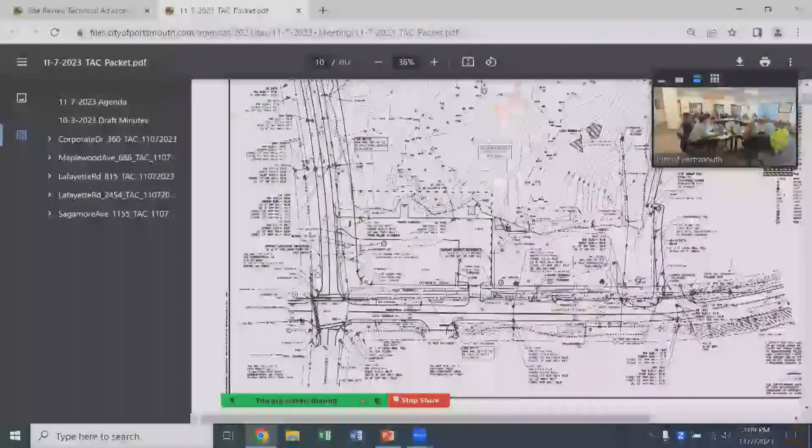To be honest, Eversource has done a site visit - their construction team has gone out and done a site visit, and we're waiting for feedback from them. But that is a placeholder from that standpoint, because that feed may not actually happen in that manner whatsoever. So I would finalize that before a planning board appearance, just so you have something from Eversource saying that we're good.

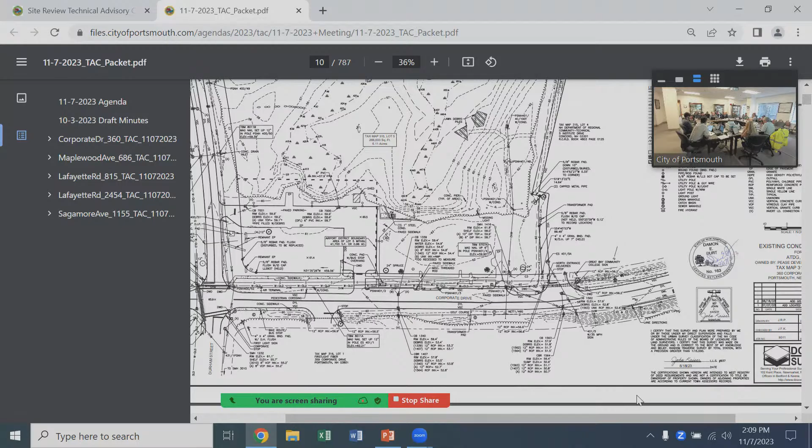That makes sense. And just to clarify, other than that, there are no more easements. And just to clarify, we do have an agreement with Eversource, similar to the one with the City of Portsmouth, where they also have the ability to go in on anyone's property and service their equipment. So I think part of this is a change in how we do things in the city versus PDA because of the agreements.

You own the fee on all of it. So it's leased property. But if you can at least clarify that for the planning board and be ready to address it.

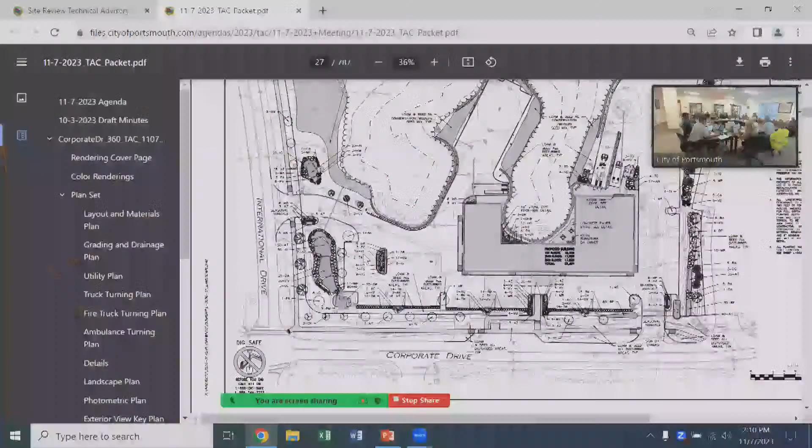I had a question about this plan - you show the wetland and your landscaping plan, let's see if I can find it here. The landscaping plan's pretty robust around the edges and different areas. The one area I don't see anything detailed, except for maybe this note over here, is - I think this wraps around to loam and seed this whole area. Is that the plan, you're just going to loam and seed the area adjacent to the wetland and that buffer?

That's correct. There's substantial topography differential, basically where the parking lot area is, so anything that fills in next to the parking lot area will have a specific seed blend. Some of those areas are called out not to be exactly loam and seed - there is a wildlife blend requested for those areas, conservation wildlife, that's in the shaded areas. I saw that, but in the grass between the buildings and the wetland, it's just lawn you're going to be putting in.

You're going to be mowing that? It doesn't say anything about maintenance or what's going to happen in that area. That's actually a functional buffer for that wetland. It'd be nice to see some plants, some shrubs, some other species. I don't know why the landscape plan doesn't address that at all.

Like Jeff was saying, there's quite a bit of grade here. We're picking our site up, and right along that buffer line is a retaining wall, so we're high and the wetland's low. There should only be 18 inches of disturbance between the wall and the buffer, so it's intended not to be maintained. It's not a mowed lawn, and it's not planted, it's just in its natural state.

So all I see here is a mowed lawn, because this note right here, the only note that addresses it is loam and seed, all disturbed areas, which to me means lawn. That's fair, but the disturbed area would only be, like I said, at the bottom of the retaining wall, very narrow, say 18 inches.

I'm not concerned about the disturbance during construction. I'm more looking for a functional buffer. And if you said in there no mowing, no maintenance at all, which probably isn't what you're going to want to do, you're probably going to want some maintenance. If you mowed it annually, maybe that would be better, but something that at least talks about how that area is going to be used and maintained as a functional buffer.

Which area specifically are we talking about? Here's the wetland, obviously you're not going to do anything in there. And then this area here is wooded, and it would remain wooded. Well, it doesn't say that anywhere, and it doesn't show it, and there's definitely disturbance to parts of it.

There's no disturbance to any of that wetland buffer there. The only reference to loam and seed that I'm looking at on the drawings is actually at the northwest corner of the parcel, which is in the right-of-way. If you look at the landscape plan, that's all white, so that's the only reference I see. But what I'd like to see, what I don't want to happen, is I don't say anything, and then in a year we go in there and you guys are mowing it right up to the edge of the wetland.

That's not what we want. To remain undisturbed in its natural vegetative state. If you're going to leave it and not do anything with it, then say that on the plan. We can add a couple notes, and then we can think about how PDA or the architect can enforce that.

The landscape architect tries to depict that with their scallop tree line. In her mind, that's wooded area to remain. Right here I see some scallop tree line, but if you zoom in a little closer, it's all the way around, continuous. So in her mind, that scallop, yes, that's all tree line, just wooded, to remain.

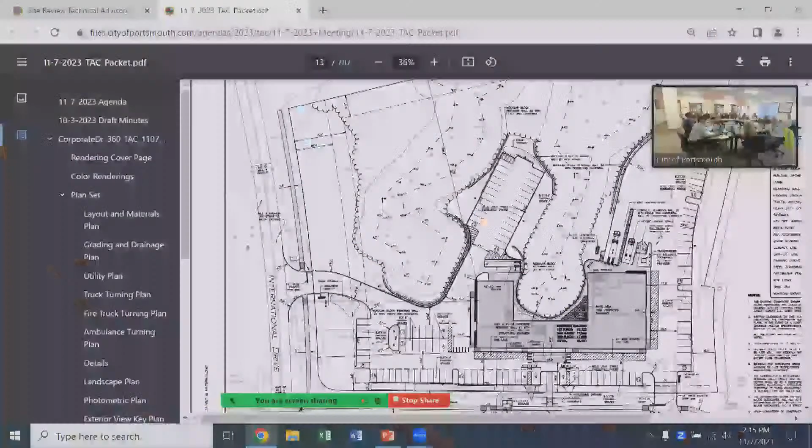You're talking at the northwest corner, correct? Yeah, right here. Rather than stopping it at the lot line, bring it up to the next driveway. Yeah, that could definitely be incorporated, without a doubt. Okay, then I'll make that a condition when the time comes.

I know tactile pads are now the PROWAG requirement, but it's not enforceable yet. Any commercial driveway with a stop sign is supposed to have them, but it's not yet required—just recommended best practice.

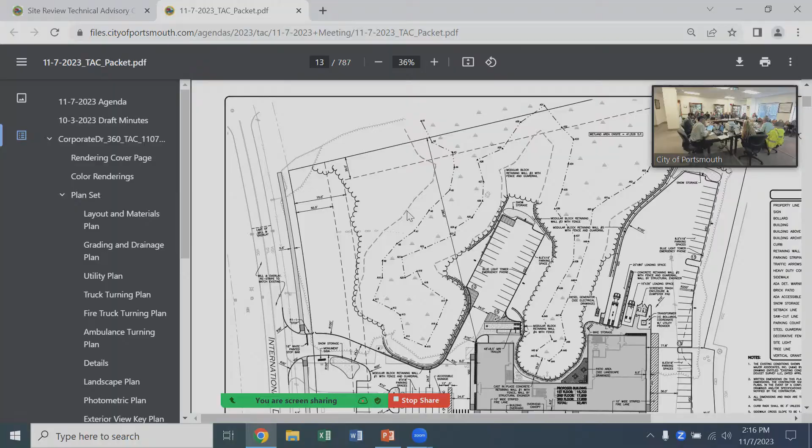I think we can definitely incorporate a tactile pad there. At each one it makes no sense not to have a tactile pad—so that would be the two on International Drive, the driveway on Corporate Drive, and where the sidewalk ends at the abutter's driveway.

So tactile pads at all driveway crossings, basically? Wherever there's a stop sign on the driveway, it's required—commercial driveways big enough to have a stop sign and stop bar, not residential driveways.

On this site plan at the driveways, this is an articulation for a fairly significant size building. To be clear, we have tactile pads located at each driveway. So it's already shown on the plan?

That would be your site plan—you'd have to find it on the details. It's pictorially shown, just very small. And if I recall correctly, there was some back and forth as to whether we want them or not, but we're happy to do it.

Okay, so we'll make it a stipulation since the rule changed—the feds changed the rules. You haven't been coming to meetings that long. It's no problem, probably happen again if you don't get an approval too.

Any other questions or comments? Anybody want to make a motion? Do we need to have a public—oh sorry. If there's no more questions or comments, I'll open it to the public. Anybody here speaking for or against this project? Seeing no public comments, we can move on to questions or take a motion.

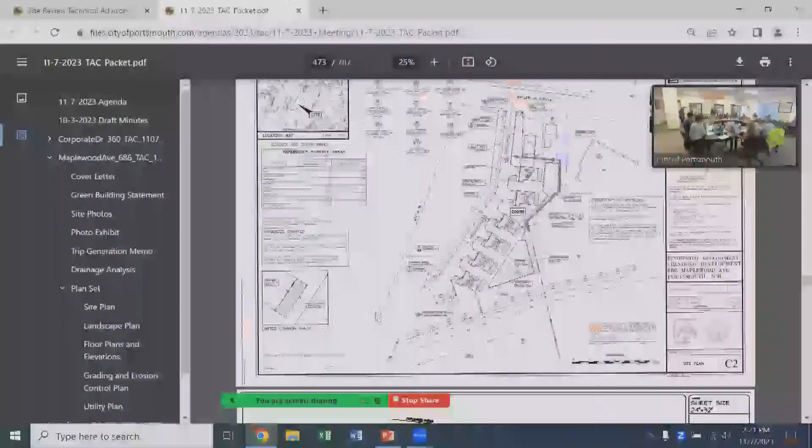The next plan is a landscape plan. There'll be some plantings along the edges, and at the entrance on Maplewood there'll be a well-landscaped entrance facility.

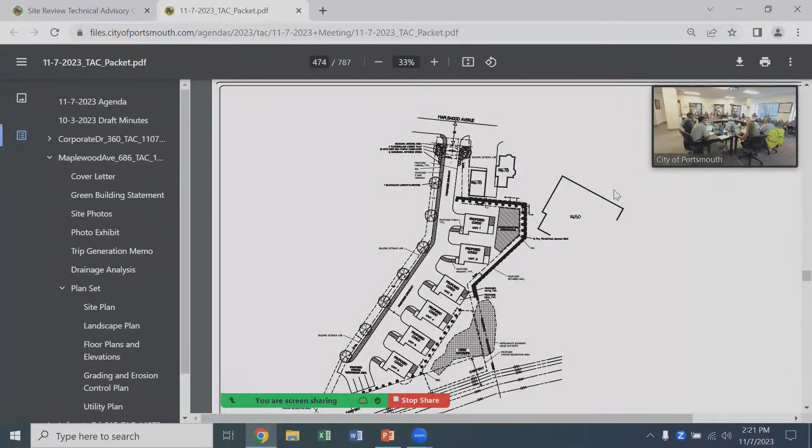The next plan is the renderings. Carla Goodknight did the architectural work, so you have floor plans in the bottom left, rendered views of the site on top, and elevation views of the units on the bottom right. They're drive-in slab on grade with two floors above, the second floor being dormered.

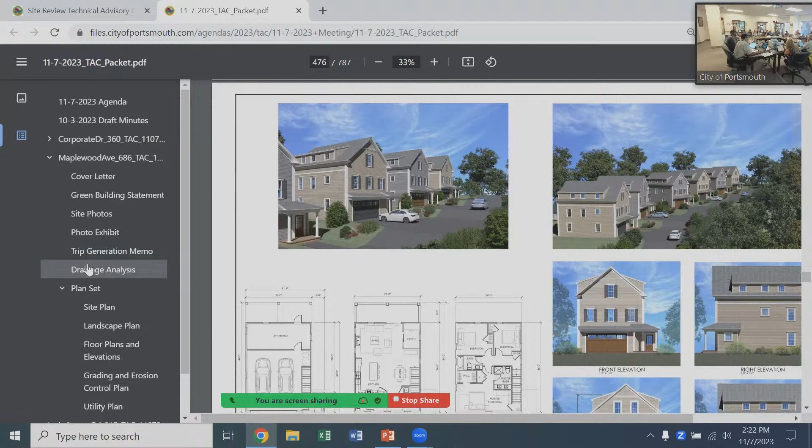Next sheet is grading and erosion control. The street will be sloping from the south side to Maplewood at a pretty consistent grade, with catch basins on the right side. Looking right of the driveway, it'll be sloped over, and that drainage will be collected and brought into an R-tank system to attenuate the peak flow. It'll come back out and connect to the drainage in Maplewood Avenue.

The next sheet is a utility plan. There's going to be a sewer line with manholes, sewer main, and services coming in. It's the same with the water, although we have some comments about that we'll address. Underground electric will come to a transformer in the middle and then be redistributed as secondary. We're looking into gas, but I think gas doesn't go that far up Maplewood.

And then we have the usual detail sheets. Included in the submission is a trip generation analysis. The site is not going to generate a lot of trips, just 4 in the morning peak and 5 in the evening peak, based on the ITE trip generation rates. We also have the green building statement from CJ Architects.

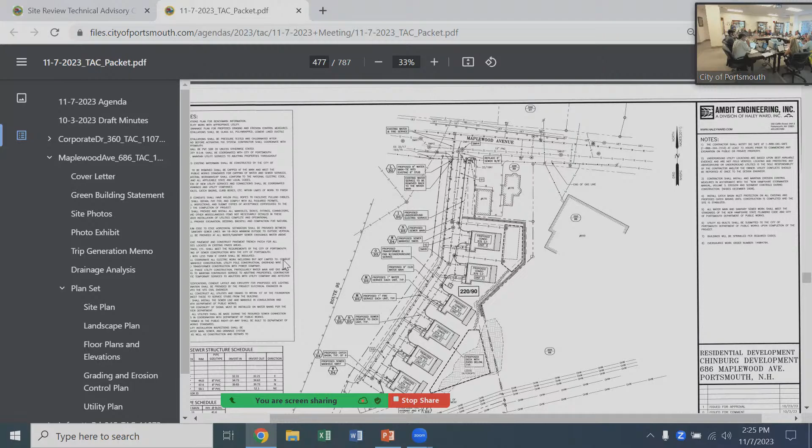The next comment is to extend the hydrant stub to around the first house and install the hydrant there, then proceed with a 4-inch main for the home connections. That's a good comment, as long as the fire department's okay with it. Did you understand the comment? I did - basically we want to limit the size of the big main for drinking water. We were thinking, without asking you guys, would it be better to have the hydrant before you get to the first house? So if you're going to use the hydrant, it's right there before you get to the fire. Well, we're going to lay in a reverse line instead of going all the way down in the back. Yes, that makes sense. To me, it makes sense.

Okay, these are all sprinklers as well, right. Which, because there's no cul-de-sac, no turnaround - the only question I had, David, is about the end of line. Do you want a flushing hydrant still at the end? I honestly don't think you need one, because it's such a short section of ductile iron, and you've got 6 houses drinking off it, so you should be okay. Okay.

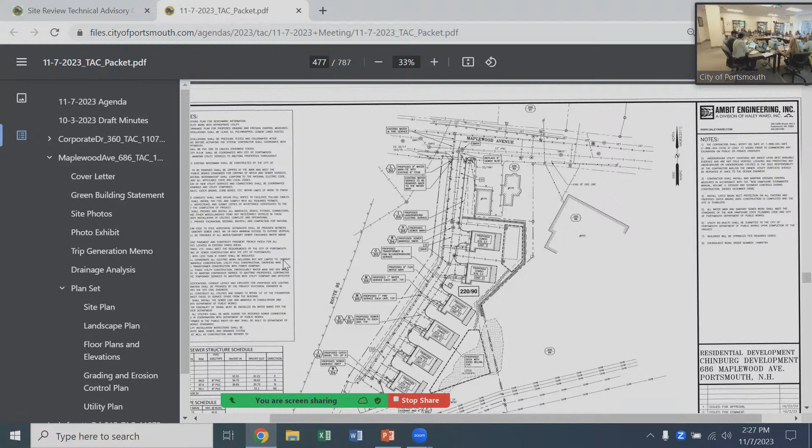Some other detail requests - the next one is to provide a more robust landscape plan that includes a planting schedule, and we will work with the landscape architect. Is there a specific comment or area that the committee sees needs more planting at this time?

That was my comment. I think we were just looking at, so there's a lot of the black pines along the back edge, but the lawn areas, what kind of seed mix is going to go in there, the landscaping around the front, and if there's any irrigation plans or smart irrigation techniques that you're planning to use.

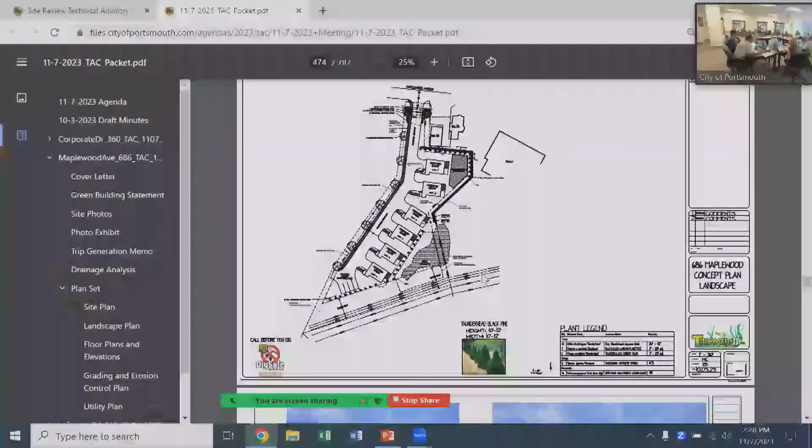So I don't think there's anything, it's hard to see on this plan, but in the front, is there anything across the driveway? It looks like there's trees but no smaller plants in the driveway areas or in front of the buildings? Yeah, okay. I can certainly add that.

As far as irrigation goes, we would not be showing that on the plans. We would just submit that if irrigation is provided, it would probably be designed at the time of installation, which is typical.

Please consider solar for the single-family unit roofs. So it's not the perfect orientation for these roofs, but Chinburg Builders is not opposed to it if the individual buyer is thinking about solar and wants to add it to the project, but they would not propose it coming out of the gate.

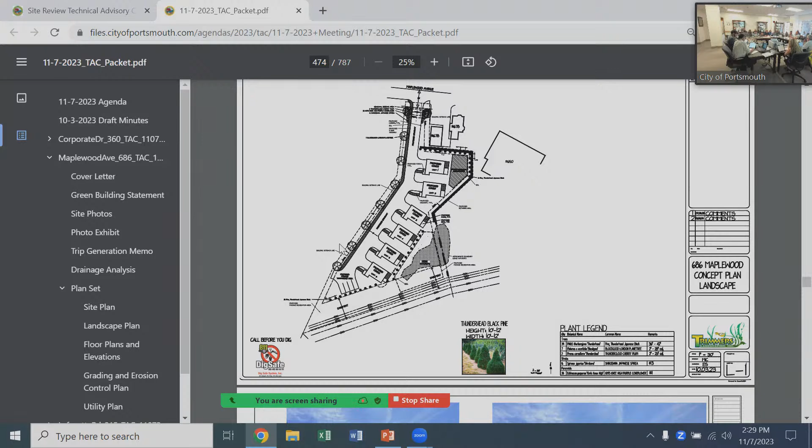Please update Note 3 under General Conditions Notes on Sheet D1, where it states that the site shall be stabilized for the winter by October 15th. That comment needs some explanation. That was also mine. I just didn't know if that was outdated by now, or if that's right out of the Green Book.

I just didn't know if it was for this past October, or if you plan to use a specific date there, but yep, that's standard generally every year. That's a general note from the Erosion Control Handbook. Gotcha, okay.

Buildings must be constructed to highway noise standards. So this project does need a noise CUP, yeah, and that will be applied for in this cycle.

Does it go directly to planning board, Peter, or - I think that one goes straight to planning board. Okay, the parking comes through TAC, yes, but the noise one, I believe, goes directly to planning board. Okay, so we'll be applying directly to planning board for that.

In regard to Note 8 on the utility plan, identify properties that would be impacted. I believe that's a general note, so it's not to imply that other properties would be impacted.

Just in there, I can take it out. I don't know whose comment that was. It doesn't mean that other properties are going to be impacted, but we want to make it clear to the contractor that they've got to maintain utility services to abutting properties.

Yeah, it is a serious wall. I think it's anything right up to over the 4 feet - I think that zoning and the building code are on the same page regarding a wall becoming a structure when it exceeds 4 feet, and that goes from the bottom of the footing to the top of the wall, right? That's in the IBC. I thought we were in sync with that. When it turns into a structure, then it requires relief if it's too close to the side yard setback, or maybe the front yard setback.

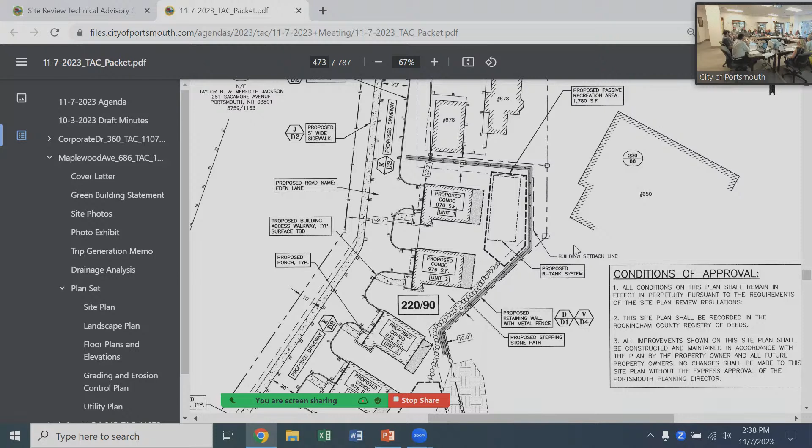But the other issue is a fence - how close a fence can come to the property line depends on the height as well. A 4-foot or less fence can be in the setback, but when you go to a 6-foot fence, you can't. So if a fence is on top of a wall, how tall is it? It's a 4-foot fence - the fence is the same height no matter what. This is the discussion we wanted to have.

And then when you say a wall over 4 feet is a structure, your ordinance says in certain places the opposite, that walls are not structures. So we need to talk more about that at the planning department level, if that's appropriate. That's appropriate, yep. Thank you. We'll look at other examples.

I think the previous approved version of this did sort of utilize the same area of the lot at a higher grade, because it drops off in that corner. And in order to take care of the drainage, we need to raise the grade. But I would review that original plan set, because putting an R-tank system that requires stone all the way around it, directly adjacent to a retaining wall that also requires stone, means that we could potentially be creating a situation where the water's blasting through the wall toward the neighbor.

Correct, it's not detailed very, very carefully. It may require some stego wrapping of the R-tank system, and it's meant to be not an infiltration system, but a detention system.

Well, the question is, is he stopping and servicing that section of Maplewood on foot, or would he want to drive up to the end of the driveway? Well, that's a good question, whether Chinburg is going to... I think it's a driving run, if I remember, but I don't remember exactly.

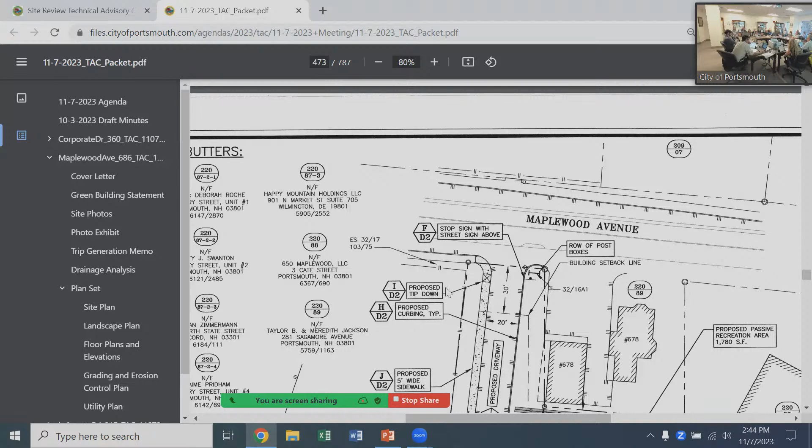The other item was that little piece of sidewalk that runs between the current site opening and 678. That'll be removed, it looks like. You'll put some curbing in there, a radius. I just don't want that radius to stick out farther than the rest of the back edge of the sidewalk, so you have a continuous line along the back edge. So you want the line of the radius to meet the gutter line or meet the back of sidewalk line? Meet the back of sidewalk line. Okay, we'll make sure of that.

It wasn't clear on the landscape plan how far back the landscaping would be from the edge of the sidewalk. We'll get a blow up of that area. It's just a sight line concern, that's all. There is a distance from centerline, but we'll check that. Okay.

So I'll make a motion to postpone this a month for additional details. Okay, is there a second? Second. Any comments, questions? Okay, all those in favor? Aye. Aye. Any opposed?

Got a site plan? Yeah, please. Thank you. It's a little slow on here.

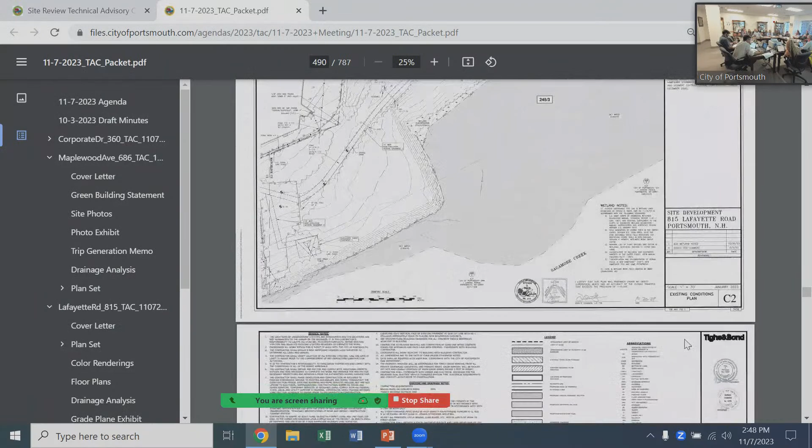The proposed project is 72 residential units in 3 separate buildings. The third building will also have a 1,200 square foot leasing office, which will be an accessory use to the residential development.

The site layout we've come up with has pulled all of the impervious surfaces out of the 100-foot buffer from Sagamore Creek. There's a wetland buffer impervious surface exhibit in the package showing those areas. Currently there's just under 12,000 square feet of impervious surface extending into the 0 to 25-foot buffer, and all of that will be removed as part of this project.

Coming into the site, there are 3 buildings that run parallel to the creek, with parking on the first floor of each building. Each building has 24 internal parking spaces with 3 stories of residential units above, as well as some exterior parking along the front facade of all those buildings, for a total of 121 spaces for the project.

The project will also require 2 CUPs. One is for the development site use, which requires 10% community space. That community space will be a greenway trail within the 100-foot tidal buffer, designed as a wood chip path, so again no impervious surfaces. There's also a substantial landscape and buffer enhancement plan as part of this project, restoring currently impervious areas and removing invasives.

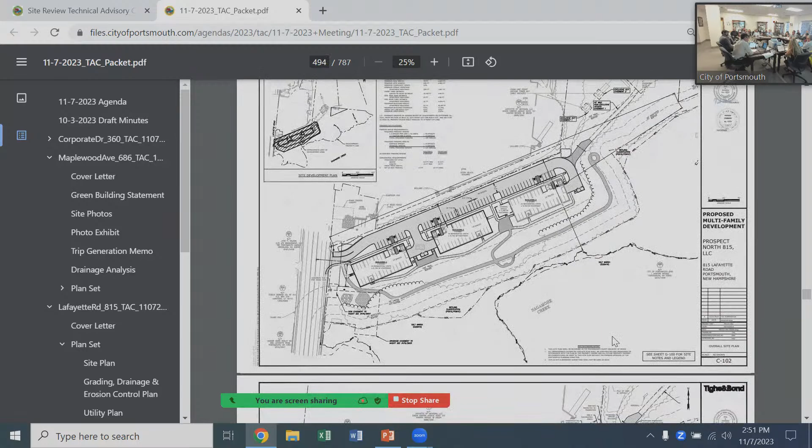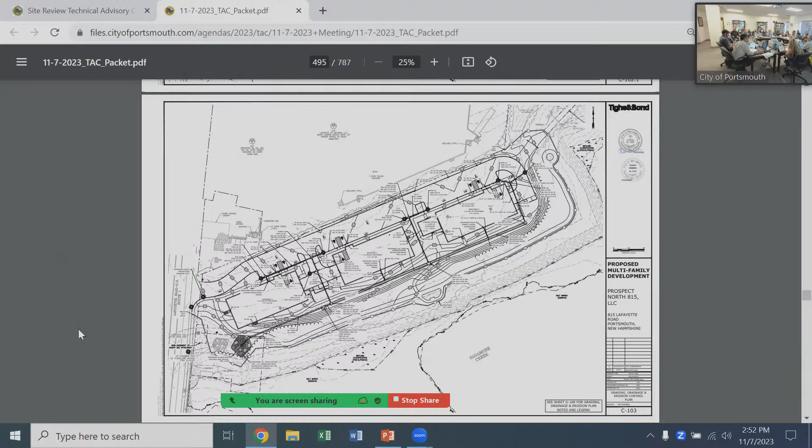The next sheet is the grading and drainage plan for the site. This site was a little challenging from a grading perspective, with a lot of shallow bedrock as well as close proximity to the abutting shopping center parking lot, so we were tied to grades along that edge. We tried to keep the buildings up a bit to minimize ledge removal required for the building foundations and utilities.

Stormwater treatment for the site will all be captured and brought to a detention system along the creek side of the buildings, outside the 100-foot buffer. It's a single 36-inch pipe with an outlet control structure to attenuate peak flows, discharged through a jellyfish filtration unit for treatment prior to leaving the site.

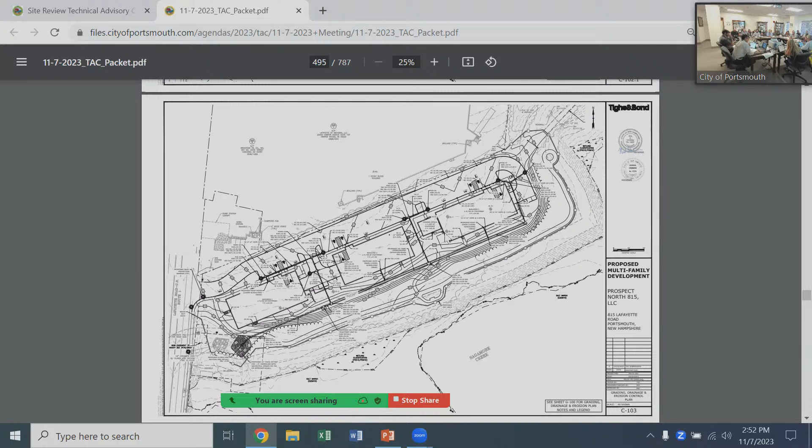The next sheet is utilities. We've coordinated with Unitil and Eversource. The Unitil will-serve letter was in the package; the Eversource one we received but not before the submission deadline. We've coordinated those services with both utility providers and are showing the utilities required for this project, as well as water and sewer, which had some minor revisions from the TAC work session based on comments received at that meeting.

The next sheet is the photometric plan. All the lighting for this project is currently proposed as building mounted, giving us the lighting levels for the front parking area and amenity spaces between the buildings. We purposely did not include any site lighting on the creek side of the buildings.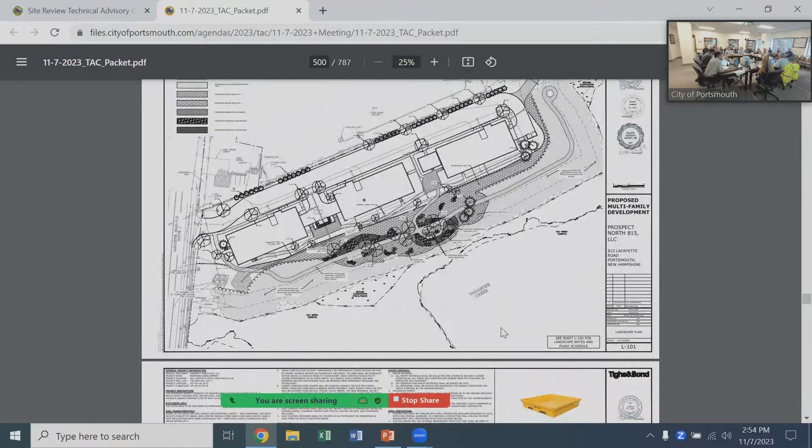Then we get into the landscaping. This was significantly enhanced from when we were here last time. I'm not sure if we included a conceptual landscape plan, but this was developed based on comments we received from the Conservation Commission during the site walk and work session. In the middle of the site, behind Building 2, is where all the current buildings and parking areas are within the buffer, so that's where the bulk of the plantings are for what is really a restoration area.

Behind buildings 1 and 3 is where we get into more selective invasives removal, with some grass mixes proposed within that 100-foot buffer. Those are listed on the prior sheet as native grass mixes, and the idea is a low-mow situation inside that buffer. Closer to the building, along the rear walkway, it'd be more of a lawn area for residents, but everything within the buffer would be more natural and lower maintenance plantings.

So that was it for going through the plans. I did want to touch on the traffic study we submitted as part of the submission package as well.

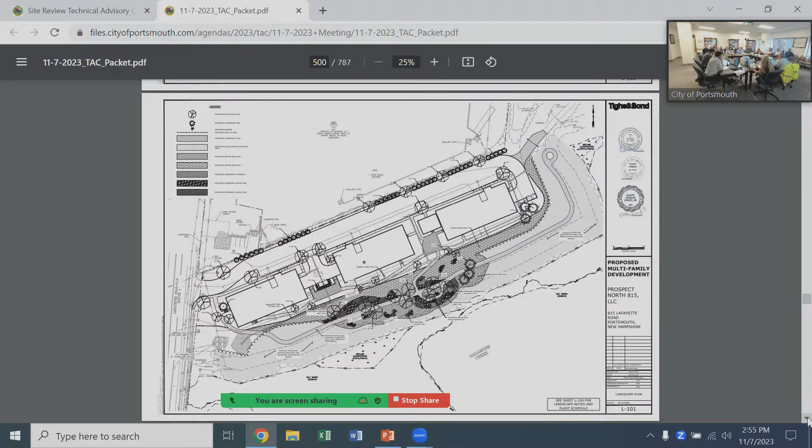That will need to go to NHDOT for review, but I wanted to touch on a couple items in there. Part of that, the trip generation for the project: we're expecting 45 trips during the weekday morning peak hour and 52 trips during the weekday afternoon peak hour.

Based on the analysis of the study area, all the intersections will continue to operate at the same level of service under build conditions as compared to no-build conditions for both the opening year and the 2035 design year, so very minimal impact to traffic in the surrounding area. But again, that will need to go through NHDOT review as well.

So now I'd like to get into the comments we received yesterday from planning and just run through those.

The first one is to provide truck access to the treatment device for maintenance cleaning. Based on where it's currently shown on the plans, we'll probably have to get that into a better location for maintenance, and we'll coordinate with the vendor to see if they have any requirements for access as well, just to make sure we're covered.

Use either a 4-inch ductile iron or 2-inch water service, not a 3-inch. We'll coordinate with the building design and figure out which way we need to go, either 4 or 2, but we will change it from a 3.

Remove planted trees from on top of stormwater pipe and utilities. We'll take a look at the planting plan and make sure we get those moved from any utility conflicts.

Tip-down ramps with detectable warning devices will be required on either side of the driveway, so we have no issue adding that. An interesting piece on this driveway, and I don't know how we want to address it, is on the south end, the sidewalk wraps into the site, which we can easily add a tip-down and warning panel to. On the north side, there's not actually a receiving sidewalk on that side of the driveway. The curb is set back, and the sidewalk doesn't pick back up until after the first driveway of the gas station. I don't know the best way to address that, but we can certainly put one on the sidewalk we're tying into.

Provide a sewer connection detail showing service connection to AC Main in Lafayette. We can add that detail.

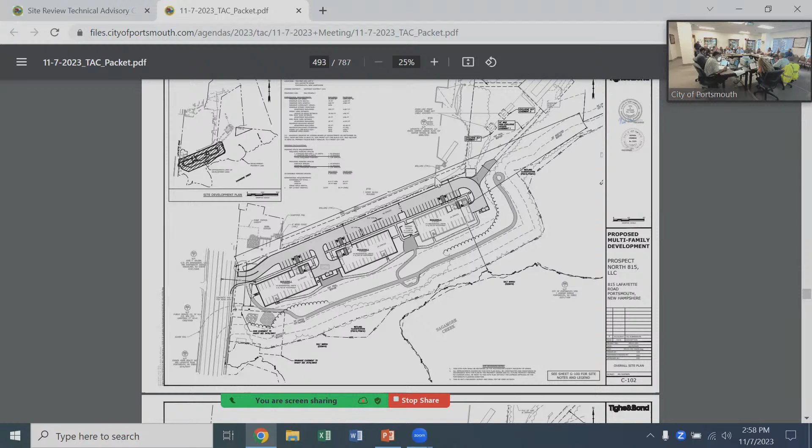Will one jellyfish system be sufficient for treating the entire developed site? Yes, it will be. The peak diversion unit of jellyfish that is specified is actually one of the smaller models they make—they go up quite a bit larger than what we have—so it will be sized appropriately for treatment.

Please consider reducing impervious surfaces where possible and replacing them with a pervious alternative. As mentioned before, we have pulled all the impervious surfaces out of the 100-foot wetland buffer. Additionally, the high ledge on this site makes pervious pavers or pervious pavement not really a practical solution for a site like this.

Please consider the use of solar on the three roofs. That's something we can bring back to the architect and the team to discuss and see if we can do anything with that.

Please consider adding additional bicycle parking outside of the ground level garage for public access. We can certainly look to add a couple bike racks in different areas of the site for that use.

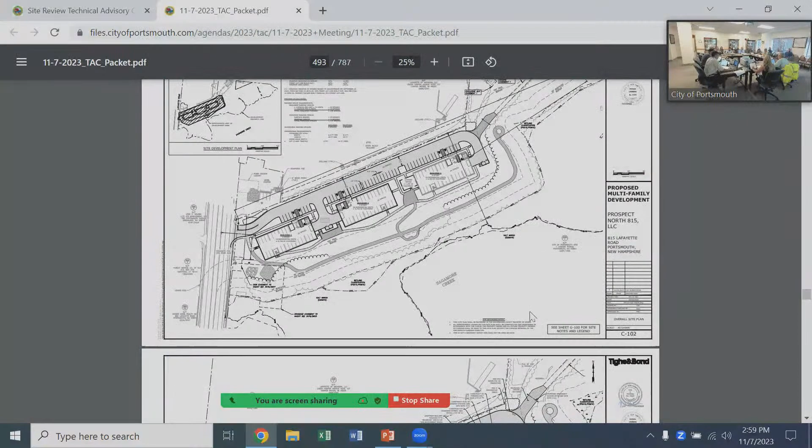Under vegetation in sheet C501, add a note that addresses the restricted chemical uses for wetlands and wetland buffers from various sections of the ordinance, and please add that as a note on the landscape plan sheet L101 as well. We are happy to do that. We can make that revision.

Please remove the community space from the 0 to 25-foot vegetated buffer. This area should not be utilized by the public due to its environmentally sensitive nature, and it is already considered protected in the zoning ordinance through environmental regulations. Please remove the vegetated 25-foot buffer from the community space calculations as well.

When we were here for the TAC work session, you'll recall that the community space exhibit at that time included the entire salt marsh area. Based on comments from TAC at that time and other feedback from Conservation Commission, we pulled the community space out of that area and just included it in the upland tidal buffer zone. There's also precedent within the city for including the 0 to 25-foot tidal buffer in community space for projects along tidal waters.

I think we acknowledge that we're not going to solve this issue here today, and we'd be happy to meet with staff separately to review this further.

Yeah, I can just give you our two cents. I mean, what you've done is great in terms of the community space—it's really nice to have that public trail go through there and utilize the buffer that way. I guess the concern is, whereas at 105 Bartlett and the other Mill Pond sites we're really restoring either impervious surface or a wetland part of an impacted part of the shoreland, this is actually pretty functional, intact in most of this—unless you can show otherwise, and maybe we're missing something.

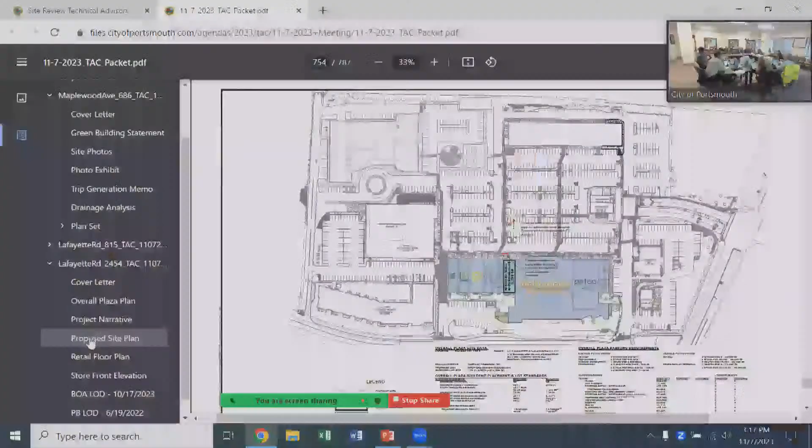Just minor. Yes, please. Did you guys cross-check where the underground storage system is for the parking lot, where you're planning these chargers? Because it's right in that immediate area somewhere—there are gigantic voids under the stormwater. Yeah, there's stormwater chambers underneath the parking lot. That's how it works. Okay.

Yeah, and I see there's a tree right there, so maybe it's out of the area, but it's right there. So just cross-check that before you start digging. Absolutely, because it won't show up and it won't get dig-safed, and you won't know about it until there's a hole in the parking lot. Okay, I mean, Tighe & Bond designed it, I'm assuming, so they'll have detail on it. Yes, they did. Okay, Durango, we can confirm that. Yep.

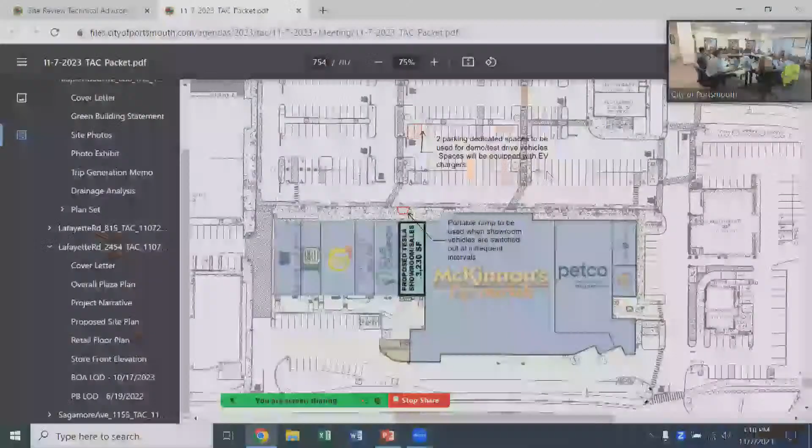But you're saying DigSafe does not pick that up? No, it didn't pick it up at all. Got it. This is for the new charger? The whole parking lot drains into this one thing underground. And putting the charger in would require running conduit, so you'd have to dig it up. Right, we'll get it, it might be fun, but it's just right there. I know it's outside somewhere, so... Got it, thank you.

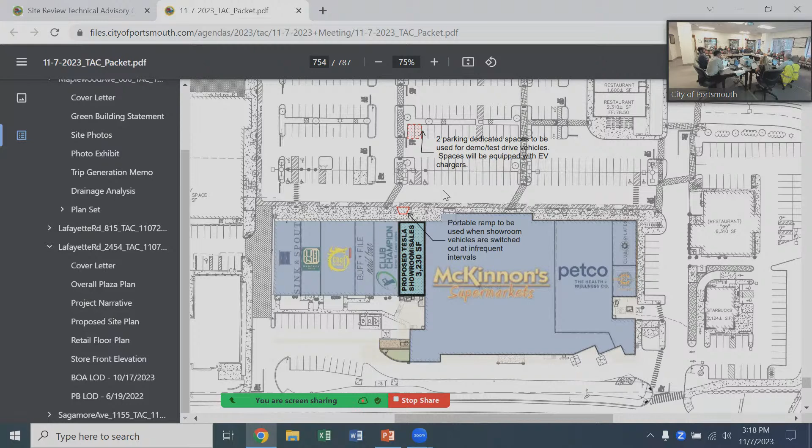Eric, the cars getting in and out, you said there's going to be a portable ramp, but one of the plans shows a new ramp. Is it... wasn't sure what was happening there. Are you constructing a new tip-down ramp? No, it's a portable unit. Okay, because one of these plans has a note I don't know how to identify. The one that shows the 2 cars inside the building has a note in red that says new curb ramp by LL. Oh, yeah, okay, I'm sorry. That's the architect's plan we initially submitted to the Board of Adjustment to give them an idea of what the interior was going to look like. But that's not accurate, there will not be a new curb cut.

Anything from building inspector or fire? I don't know right now, I mean, maybe I'm missing it. You have to look at the overall type of construction, the area, the required separation between the vehicle showroom and the adjacent spaces. I don't know if you went that far at this point. I don't think you need to either. I think the use right now is what they're looking for approval on, and then they will cross the bridge for inspection review and fire review down the road.

Happy to see there's a... that's not here, that's why I'm here, in case we had any of those questions early on, but I'll be working closely with you and your team to ensure we address all those items properly. I'm happy to see you have an FPE on board at this early stage, as it should make things easier down the road. But we'd need to look at all those things, which aren't on the plans right now.

Understood. Okay, this is an amended site plan and a conditional use permit for the parking to be amended as well. That's correct. So we'd look at doing those together, but first I'll see if there's any public comment.

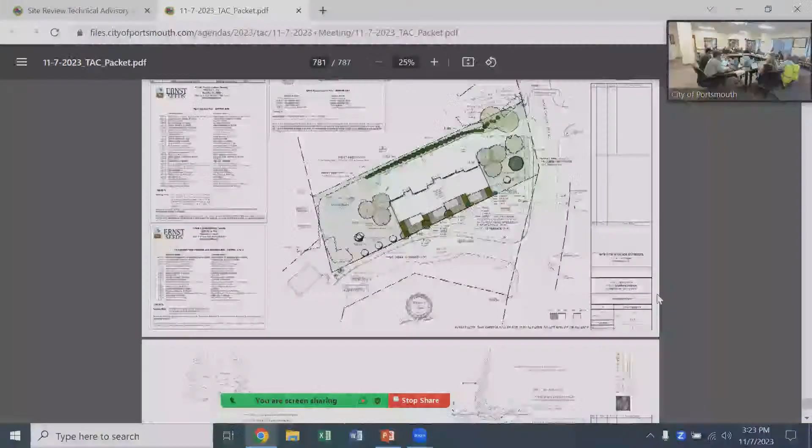A landscape design — Terrence Parker from Terra Firma Landscape provided a landscape design. Just to point out, it does include the rain garden mix, which is under the plant schedule on the top left. He's got some plantings along the northerly property line, some plantings on the south, but there is a large planted area on the abutting property immediately adjacent, some trees in the front and at the back.

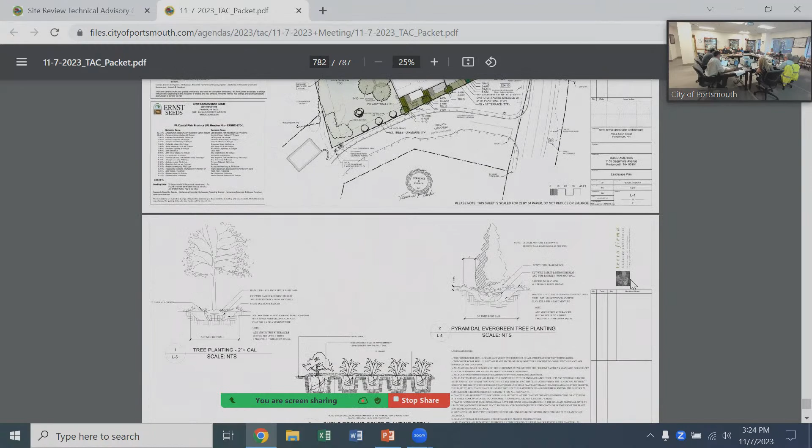The next plan is details showing planting details and instructions that we have.

Grading and erosion control. The drainage will be directed to a rain garden on the left, or northwest portion of the property, and that will provide the mitigation for the increased coverage. The full drainage analysis was included in the application package, showing that we're not increasing stormwater runoff.

And then there's a utility plan. There's a water line on this side of Sagamore Avenue, which will provide water service. We're showing a connection underground with a pole-mounted transformer.

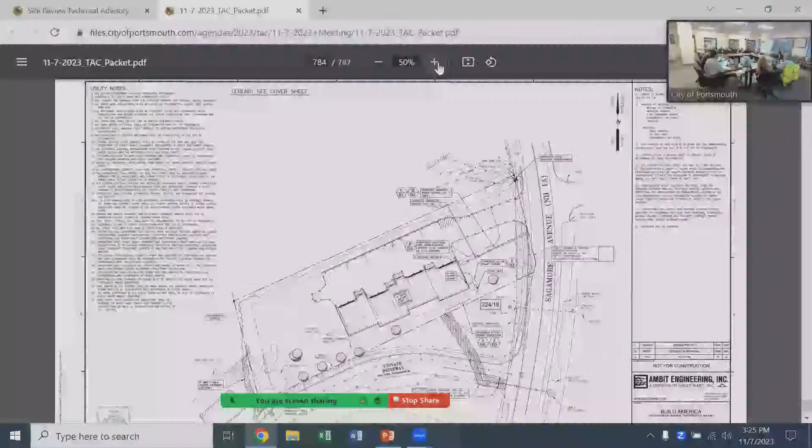At the tech workshop, we had a pad-mounted transformer, and the initial information from Eversource is that we probably wouldn't need that, but they've come back and said we will need a pad-mounted transformer, so we'll be going back to that design, which simply puts a transformer to the right of the driveway, before that striped location, as we had shown in the previous plan.

So then the conduit is run to the same location. Sewer connection is over an existing low-pressure sewer stub that was left when the C-Star condominium site was developed to the south.

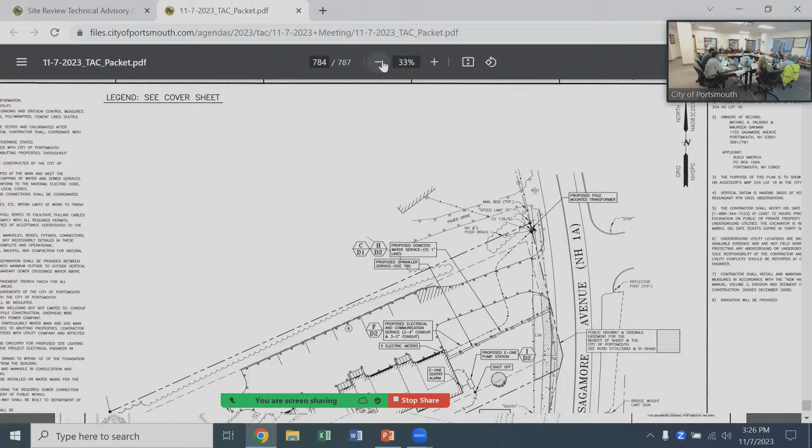In your packet is material from E-One — there was a question about the capacity of that line. It does have enough capacity to handle this proposed 4-unit building.

And then I think the rest of the sheets are just the standard details. I'm going to pass out some information that addresses the comments that we received from staff.

Dave, will you keep those moving? Thanks.

So what you have are the plans that we revised to address the comments, and the cover letter repeating the comments, and I'll go through those if it's appropriate at this time. Please — the city will need our standard leak valve and meter easement for the private water system.

We added note 9 on sheet C4 that covers that requirement, and obviously you would move this forward with that being a condition of approval.

Run one 4-inch line from Sagamore and branch off for each unit. I'm assuming that refers to the water services, but the applicant would like to serve the individual units with individual services off of the 4-inch line.

Well, when we came to TAC — you really don't want 4 taps off of Sagamore Avenue. Okay.

So would you want that 4-inch line to be in it? These condos — they're apartments? No, they're condos, so they can have individual meters.

Would that be in a metering room or in each individual unit? So we added a meter room on the right-hand, or east side, of the building.

That's where the fire suppression system is going to enter to? Correct. Yep. So it'd be an exterior entrance.

So you'd run one water line into the metering room? Oh, okay — yeah, you said it's not labeled as such, but I thought... it has been added to sheet C2 and labeled on the utility plan.

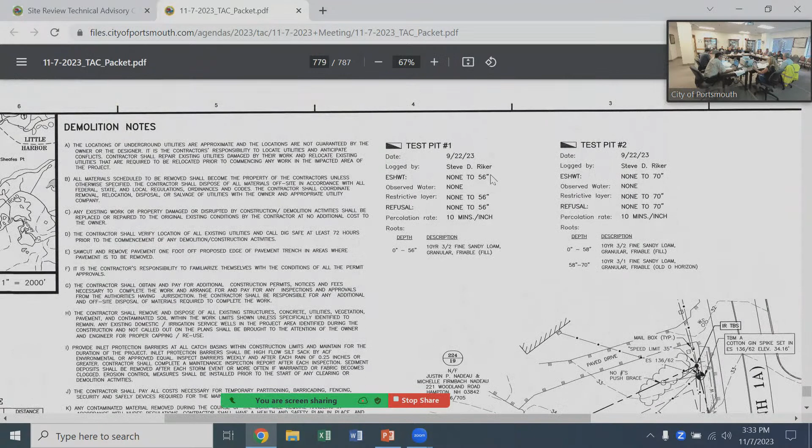Fine sandy loam, excellent. Okay, so you're gonna do a cross-section. Yep, good, we can do a cross-section. Then, as you know, there's been a very long history of water not draining properly off this site, so I think your grading plan should be a little more beefed up. Maybe some leaders to show which way things are supposed to drain, and maybe some spot grades around the building.

Sure, yeah, I know you had a comment on that swale, that water coming off the backside goes through that swale line and into the rain garden, and not short-circuited, because the 33 contour is right there on both sides, so I'm gonna make sure the water goes into the rain garden and not short-circuited away from it. So just a couple of dashed lines with little drainage arrows, so when Vincent's out there looking at it, it's very clear what the intent was on the design. Very helpful if you could do that. Absolutely, thank you.

Dave, were you talking about the gutter system as well? That would all go into the rain garden? I don't think there is a gutter system, I think it just kind of falls off the side and goes along the grass. Got it, yes. Okay, the comment about foundation drains or sump pumps is just for the slab on grade, no gutters.

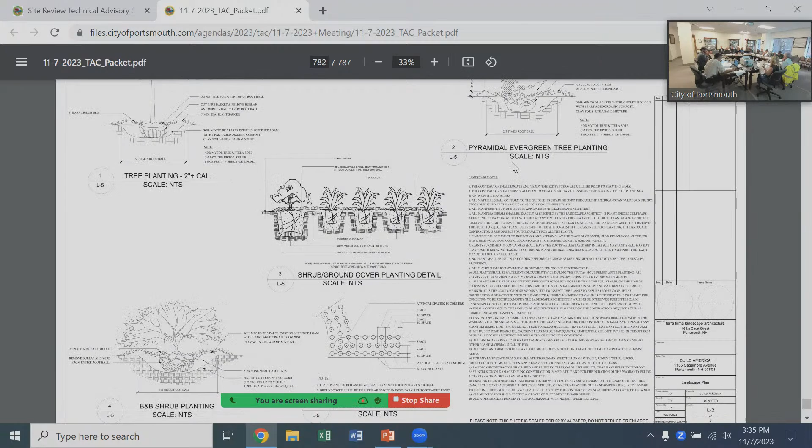A green building checklist is needed; the architect will provide that, hopefully, if we get moved forward, for the planning board to review. A planting schedule and irrigation plan with the landscape plan is needed. So there is a planting schedule on the landscape plan, in the top left corner. And then we put note 8 on sheet C4 regarding irrigation, and the note just says that in the revised version, irrigation will be provided on a separate metered service. Designs of irrigation will be provided by the landscape contractor at the time of construction.

Rain garden detail sheet, we can add that. I don't know what other details would be needed - was a planting detail the comment? The rain garden detail, the cross-section showing the layering, how they're going to build it, and noting not to compact the bottom. I think because it's in cut and it's a gravelly soil, we didn't include it, but we'll definitely provide a detail.

Please consider reducing impervious surfaces where possible. We're not sure there are a lot of opportunities - we think we did a tight design and tried to conserve pavement. I don't know if you have some ideas you want to throw at us, but that's a comment.

And then an easement plan. Getting back to the water line, the 2-inch would be private, but we're still going to want to be able to get to the fire room. We would have our own key, and an easement that allows us to have our own key and go in there anytime we felt we needed to. So you'd want an access plan, an access easement. It would be for valve turning, leak detection - that's a blanket easement, but we should show an access easement.

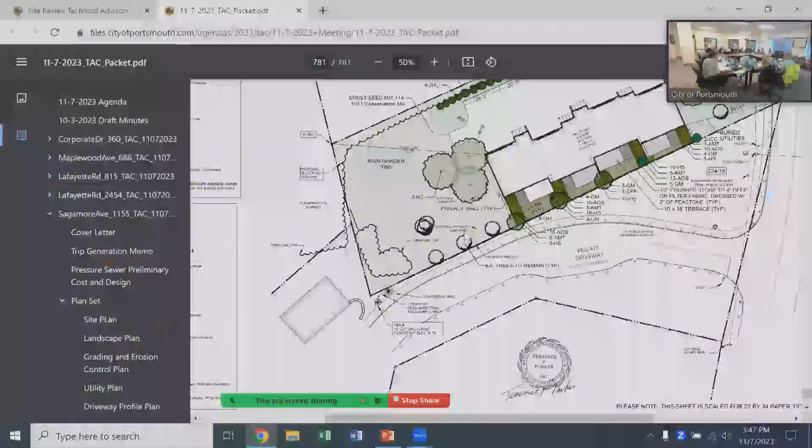And I'm right here, I can help you delineate what the association would like. If I misspeak about what you just said, please correct me. So Terrence's plan does have the 6-foot wood privacy fence, about halfway up. In the street there, Peter, it says 6-foot privacy fence. So the intention is to keep that.

The applicant is here. Can you show me where it begins and where it ends? Honestly, this is very Greek information to me. It's just a label on a line. The line goes the whole length. If you go to the existing conditions plan, it's clear where it begins and ends. It might be clear to you all, but can you help me just understand it?

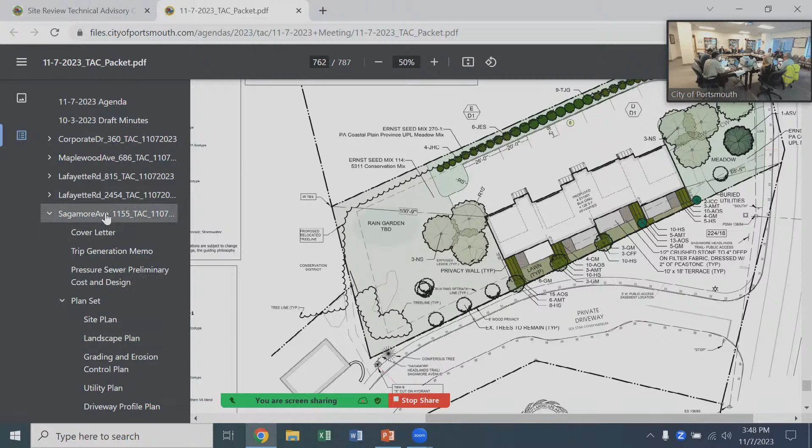Yes, we're trying to get that plan open, if I can get there. Where's the existing conditions, and where's the site plan? It's in the plan set, it's the first sheet, existing conditions and demolition. So it's before that. Funny how it got bookmarked, didn't label that one. Okay, here it is.

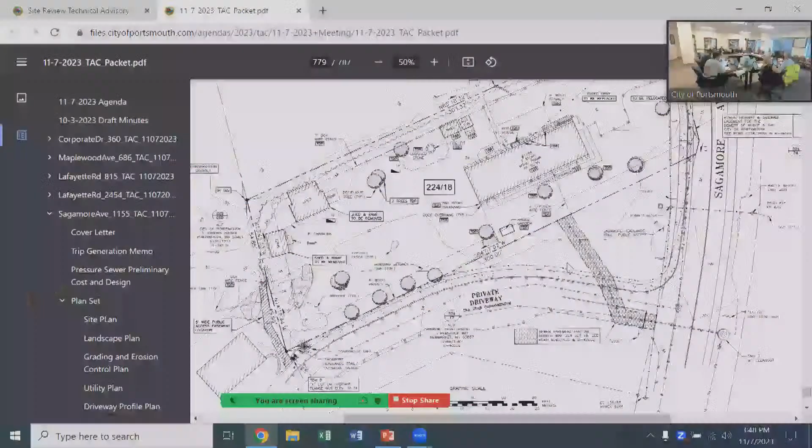So the fence now runs from the corner by the hydrant, pretty close to the hydrant, you can correct me on that. It runs the whole back end of the nature path, then rounds the corner, and comes up just beyond the larger part of the landscaping area. Yep, you'll see it there. Right here? Yeah, right, just a little bit further over.

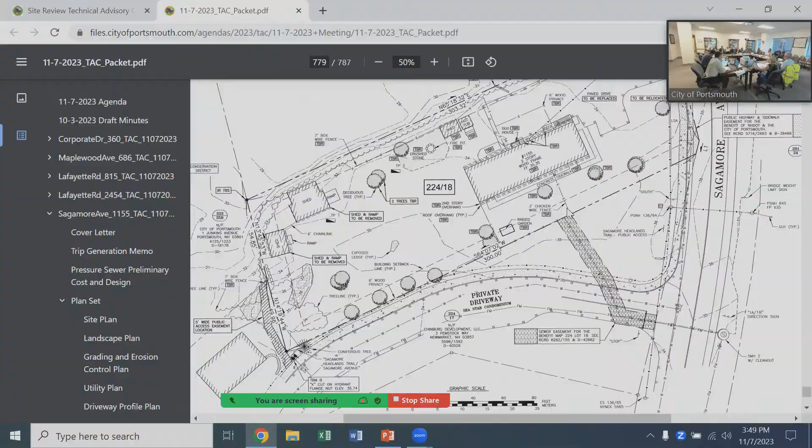And then it says chicken wire fence that connects to the building. The current owner has had dog run problems, and he's not going to be the future owner. And then, I believe she said it runs down along the private driveway, and then takes a right turn for a piece. Is that correct? Yeah, it doesn't enclose the full back end of the nature trail, but we are asking that it will or should.

So if we could go back to the landscape plan, see that. I guess I feel like this isn't really the purview of the site review approval. It sounds like it's something the neighbor's willing to do, and you guys might be able to talk about it offline. We don't need to get in the middle of where you put the fence and how it looks. Right, I agree, it sounds like they're willing to do it. You can have an offline conversation, that'd be great. Sure, thank you.

And the fire hydrant shouldn't be an issue for this application. The fire department's here. The site would be on its own, and the fire department would service it from, I would imagine, the infrastructure that's in Sagamore Avenue. The speed limit is not a function of what we're doing here today, although we appreciate and understand those concerns.

And then the property survey update question. The gentleman is referring, I believe, to the site plan that was prepared and recorded for the daycare back in 1996, which has a different lot area than the current survey. The difference is just that the site plan survey is older and was based on a rough idea of the property line so the site plan would go forward. So you have a stamped survey plan with an area, and I don't think there's any need to hire another surveyor. Who's the original surveyor, do you know?